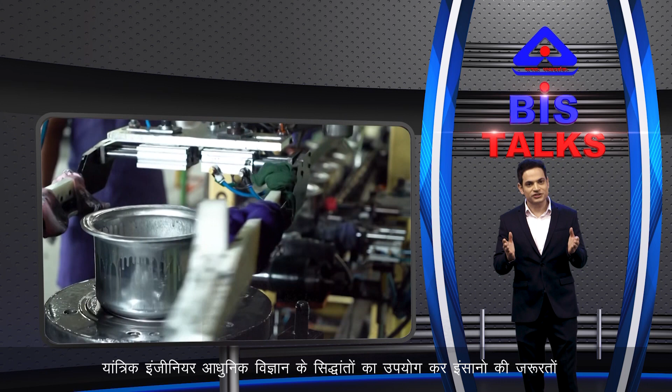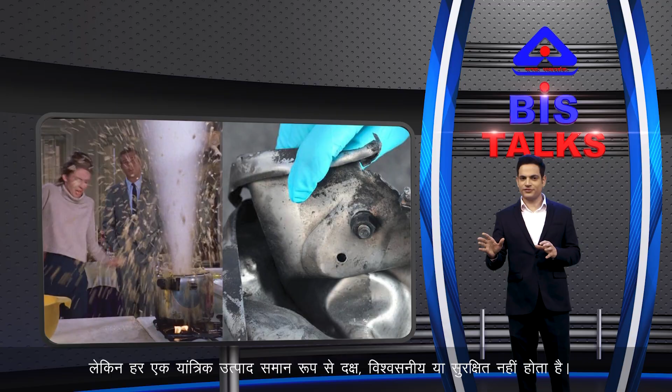Mechanical engineers use principles of modern science to create machines to meet a wide range of human needs. Hence, the objective of mechanical engineering is to create products that complement modern living in every way. But every mechanical product is not equally efficient, reliable, or safe. That's why it becomes even more important to make them follow seamless quality parameters specified in the BIS standards.

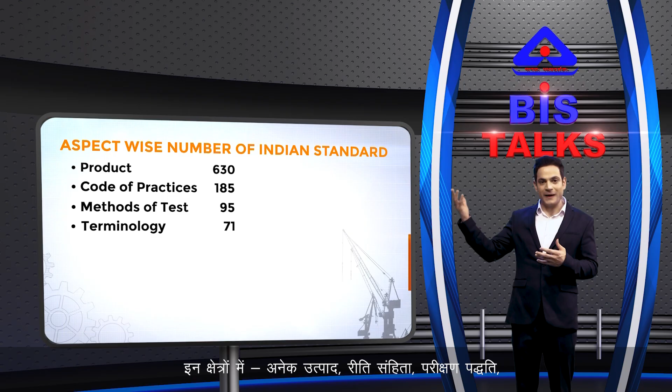When it comes to setting standards in India, the Bureau of Indian Standards is the ultimate authority. Till date, the Mechanical Engineering Department of BIS has formulated around 1,356 standards. The division is responsible for a vast number of areas within its domain, touching our lives in multiple ways. These areas cover products, code of practices, methods of test, terminology, among many others, which we have listed here for you.

BIS officers do not formulate standards in isolation. There is a streamlined mechanism to involve all relevant stakeholders of the particular field in the process of standard formulation. Let's first hear from the chairman of the council.

Mechanical Engineering Division of BIS oversees standards for heavy engineering, serving the core sectors of economy such as energy, mining, transportation, as well as the light engineering sector encompassing consumer goods to utility products. MEDC is organized with 28 technical committees entrusted with the responsibility of formulating, updating, and adopting standards needed for the products and processes. The technical committees are headed by industry experts in the respective domain to bring in latest concepts and standards needed for upgrading Indian products to compete in global markets.

MEDC is playing a pivotal role in evolving and upgrading standards, thereby uplifting the quality benchmark to make products globally competitive, which is vital for sustaining economic growth and boosting Indian economy.

Let's hear from the head of the department who leads the effort of setting standards in BIS for the Mechanical Engineering Department. It is the constant endeavor of BIS to formulate standards and revise standards that are in line with national priorities and emerging technologies.

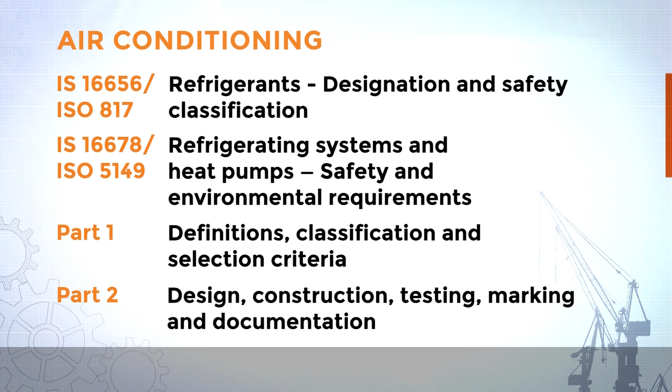Have you ever wondered what modern life would be without a refrigerator? I mean, not just about the ice and cold drinks, but the huge lot of conveniences they offer in terms of storing food and other stuff.

Refrigeration helps in preservation of food and beverages, which in turn affects the health of an individual. It is also a source of income generation for small shops which sell commodities with limited shelf life. Modern life also demands commercial refrigerating appliances like deep freezers, walk-in cold rooms, and display cabinets. I think you will agree with me that to be completely efficient and effective, they too need to follow seamless standards. Let's get more clarity on the subject from our expert.

The standard on household refrigerating appliances have been revised recently, where the direct cool and frost-free technology have been merged into a single standard. This standard specifies the essential characteristics of household refrigerating appliances cooled by internal natural convection or forced air circulation. The tests defined in the standards are meant to assess the fundamental design and operation of refrigerating appliances. Various tests such as storage test, cooling capacity test, freezing capacity test, mechanical strength test, electrical safety test, etc. are specified to ensure performance and safety.

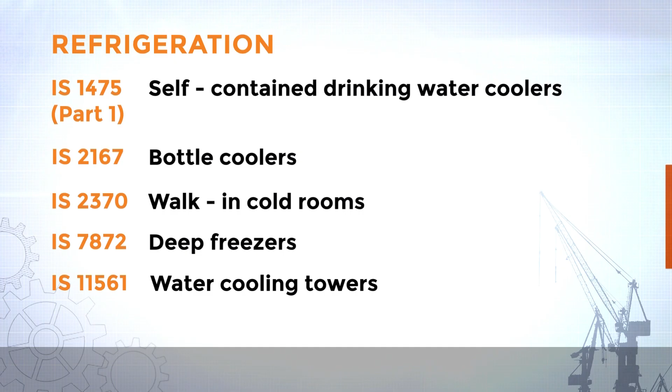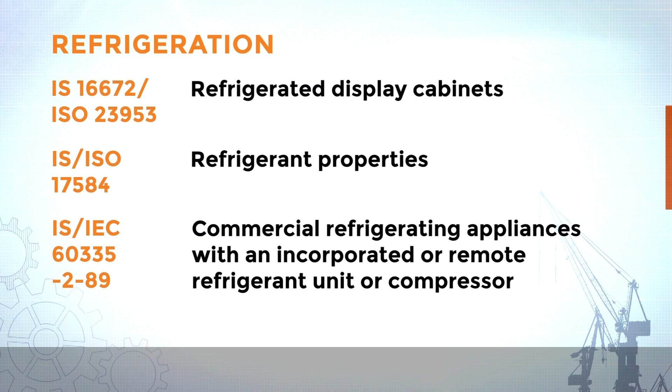Let's move on to our next subject.

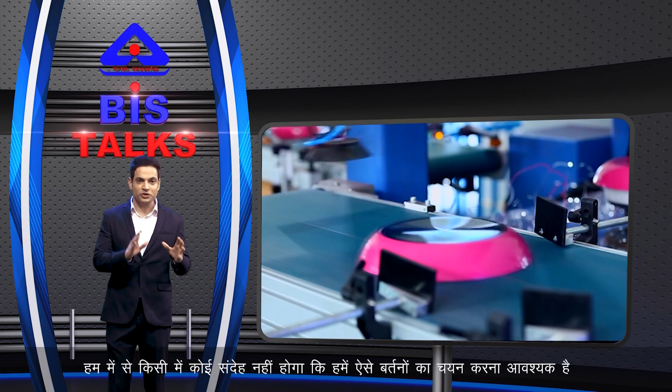I think there is no doubt in any of us that it's absolutely necessary to pick the utensils that are safe to use and efficient enough for the specific function. Also, the pots and pans we use for cooking and eating have to follow stringent quality parameters since it directly affects our health.

The most visible sign of implementation of these BIS standards could be seen on the humble, everyday pressure cooker. The pride of every kitchen should come with an ISI mark, that's for sure.

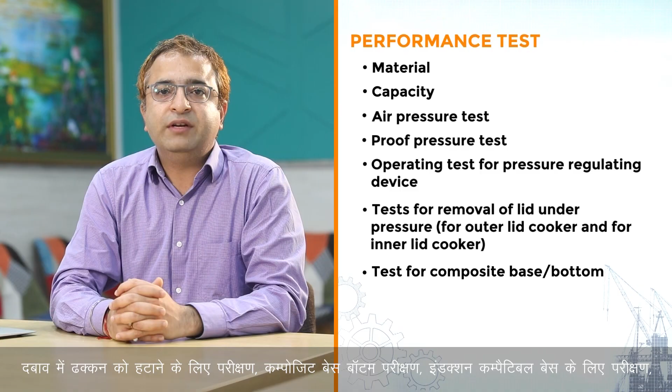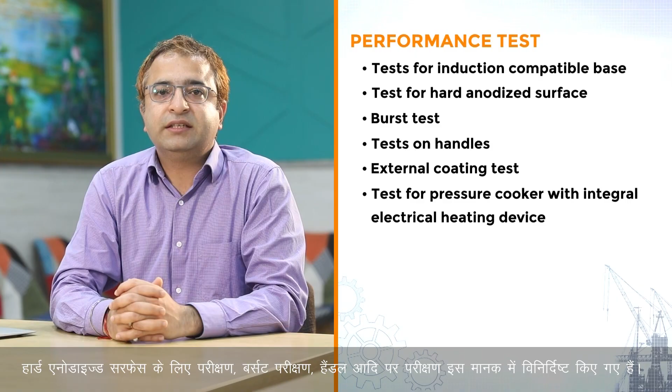IS 2347 covers the requirements for domestic pressure cookers. To ensure the safety and quality of pressure cookers, performance tests like material, capacity, air pressure, proof pressure, operating test for pressure regulating device, test for removal of lid under pressure, test for composite base or bottom, test for induction compatible base, test for hard anodized surface, burst test on handles, etc. has been specified in this standard.

Now for the other pots and pans we use to store, cook and eat food, their quality too has a direct bearing on our health. For instance, the standard IS 14756 prescribes general requirements, quality of material and thickness for stainless steel cookware.

IS 14756 lays down the requirements of cooking, serving, and storage type stainless steel utensils. To ensure safety and performance, tests like material, staining, mechanical shock test, thermal shock test, dry heat test, and coating thickness test have been specified in this standard.

Other important standards under this area are listed here. Let's move on to our next subject.

Cooking gas mostly comes in the form of LPG, or liquefied petroleum gas. This is the go-to cooking solution that we are so familiar with, and the risk factor gets minimized to negligible through the standards set by BIS. Let us now understand this better with a manufacturer who will acquaint us with the value of standards.

IS 3196 Part 1 standard is for manufacturing cylinders for liquefied petroleum gases, LPG. As all are aware, the LPG cylinder is an integral part of kitchens for cooking purposes. This standard lays down the minimum requirements for the materials, design, manufacture, construction, tests and marking on these cylinders. Depending on the capacity, the construction can be 2-piece or a 3-piece cylinder. This standard prescribes requirements like design, welding, minimum thickness, valve connection, foot ring, valve protection ring, heat treatment, etc.

This standard also prescribes tests like radiographic examination, water capacity, hydrostatic test, pneumatic leakage test, fatigue test, hydraulic burst test, mechanical tests to ensure safety of the cylinder.

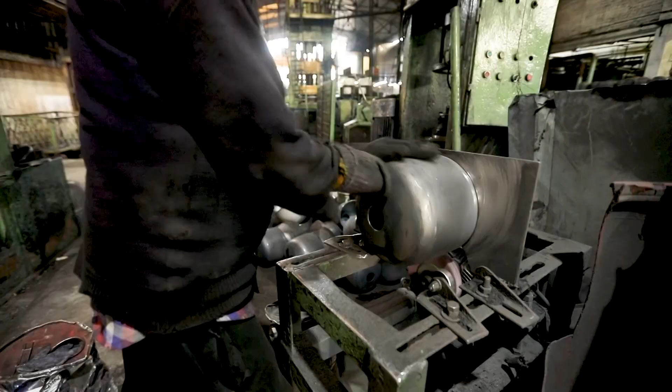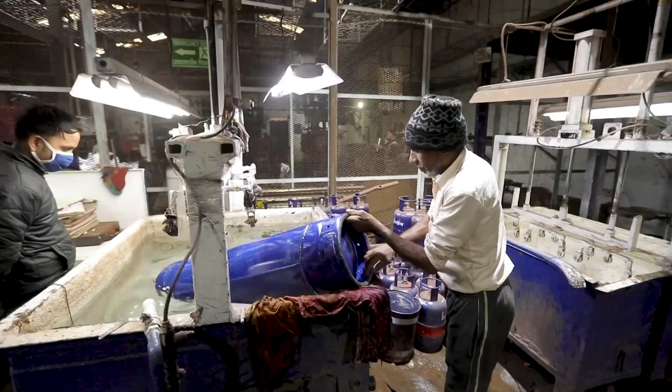Other important standards under this domain are listed here.

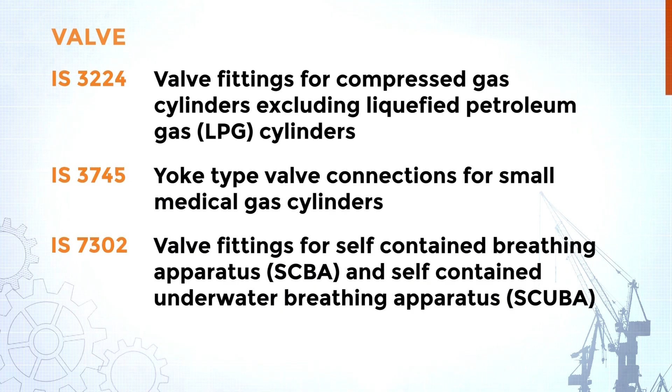Up next is the gas stove. The importance of this standard can be estimated by the fact that there are about 300 BIS licensees for one single product, the LPG gas stove. To make them safe, efficient and reliable, multiple tests are conducted before certifying LPG stoves, which have been specified as per IS 4246.

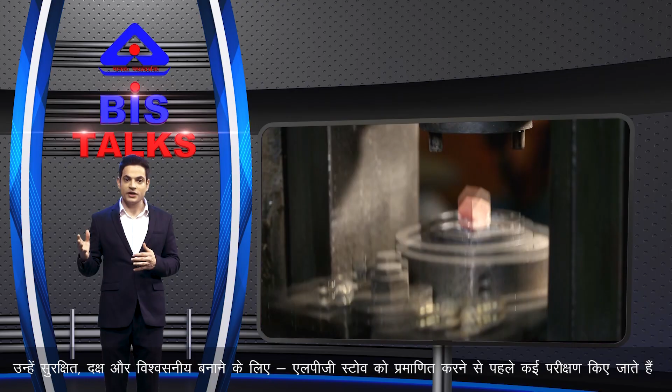A relatively new entrant to the field is the gas stove for use with piped natural gas, or PNG, covered by IS 17153. With more than 50 lakh users, usage of PNG as a cooking medium is now on the rise.

There are two standards on gas stoves: IS 4246 on LPG and IS 17153 on PNG. IS 4246, domestic gas stoves for use with liquefied petroleum gases, specifies construction, operation, safety requirements and tests for domestic gas stoves with metallic bodies, with or without toughened glass top, intended for use with LPG at 2.942 kilonewtons per square meter gas inlet pressure.

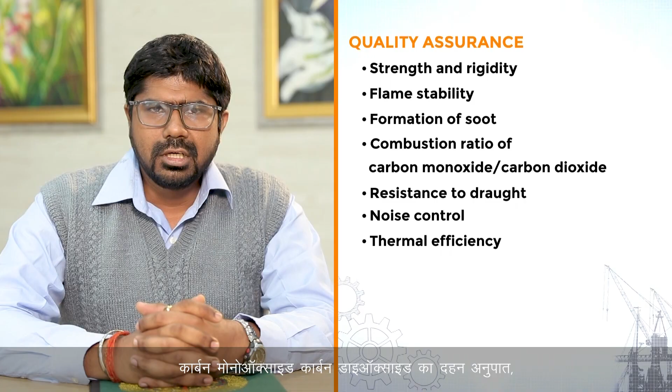To ensure quality and safety, various tests are performed such as strength and rigidity, flame stability, formation of soot, combustion ratio of carbon monoxide to carbon dioxide, resistance to draught, noise control, and thermal efficiency. The standard for PNG, IS 17153, domestic gas stove for use with piped natural gas, is similar to IS 4246. The difference is in delivery pressure of PNG, which is 2.14 kilonewtons per square meter, and minimum thermal efficiency of PNG stove is 50%, whereas for LPG it is 68%.

Let's move on to our next subject.

IS 17018 Part 1 talks about the standard related to solar photovoltaic water pumping systems, centrifugal pumps. It specifies the technical requirements for solar photovoltaic water pumping systems for handling clear cold water, covering design qualifications and performance specifications. The pump set of this system can be installed on a suitable bore well, open well, water reservoir, water stream, etc.

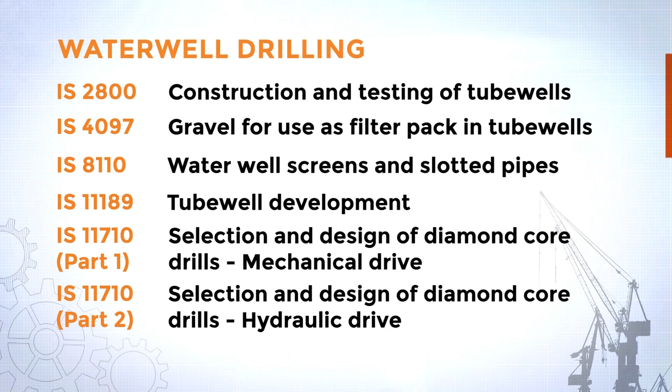Let's move on to our next subject.

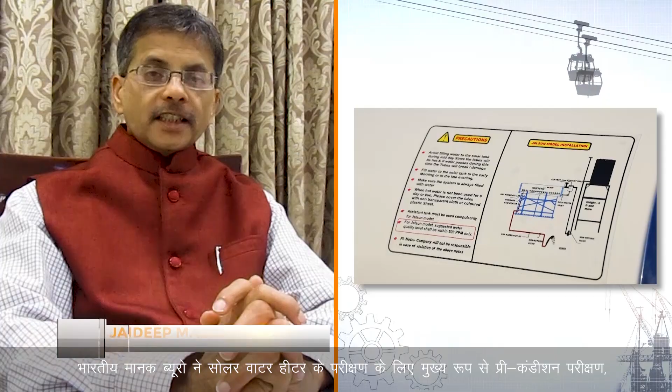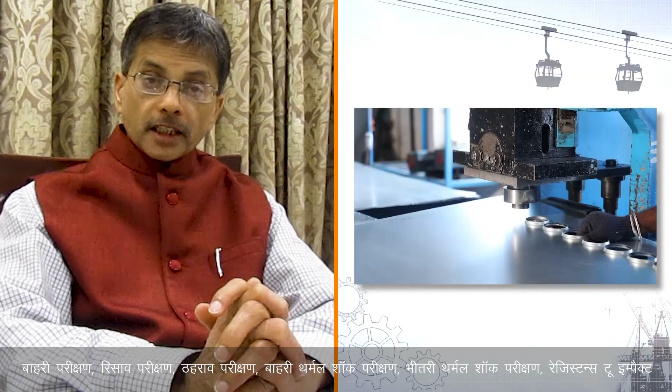India is a land of abundant sunshine. This makes solar energy one of our most widely available natural resources, and this reflects in the increasing popularity of solar products. The Bureau of Indian Standards has laid protocols for testing solar water heaters, namely precondition test, exterior test, leakage test, stagnation test, external thermal shock test, internal thermal shock test, resistance to impact, and thermal performance.

Thermal performance is a measure of the efficiency of a solar water heater. It is measured as the difference of temperature at the beginning of the day and the heated water achieved at the end of the day. Higher the temperature, better is the quality of components used.

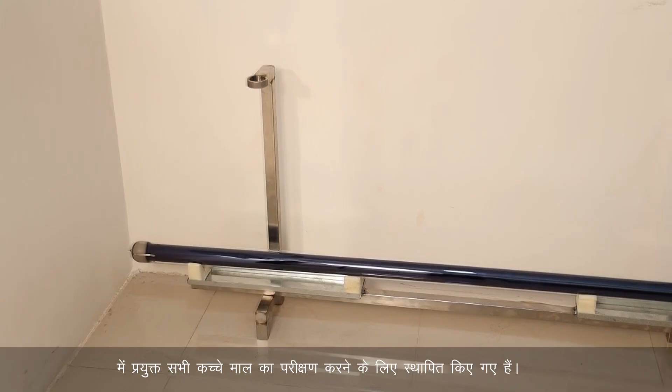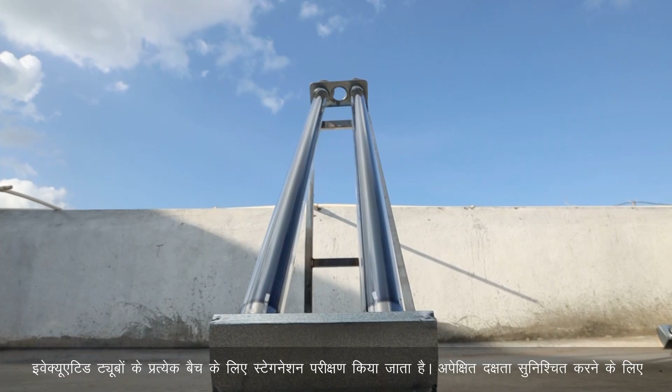Our testing laboratory and R&D center is established to test all raw material used in solar water heating systems. For each batch of evacuated tube supplied, an impact test using a 120 gram stainless steel ball is conducted. Stagnation test is conducted for each batch of ETC tubes. Only 3-layer tubes are used to assure required efficiency.

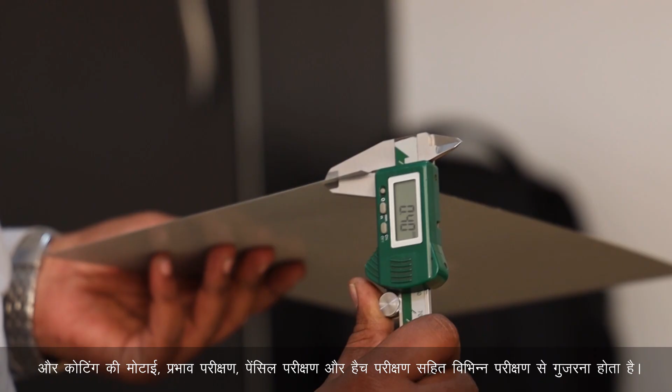The pre-painted PPGI sheets, with top coating of minimum 20 microns and a bottom coating of 7 microns, are used for outer cladding and undergo various tests including checking coating thickness, impact test, pencil test and hatch test. All tests are conducted as per IS 16368 of 2015. Here is the list of some of the key standards under this area.

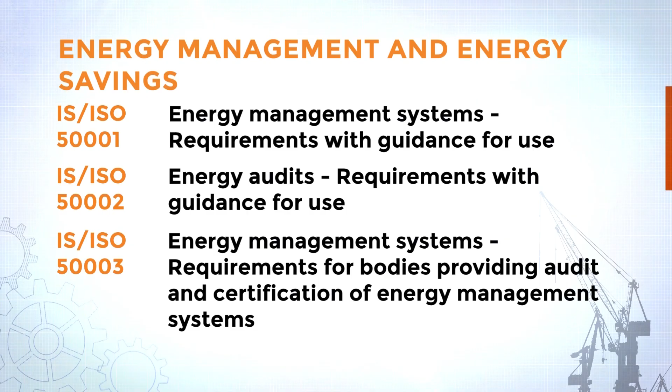Let's move on to our next subject.

If we are asked to make a list of things we need for our complete peace of mind, I am sure most of us will have safety and security at the top of that list. Not just for our own selves, but also for the things that we value, stuff that we have earned and assembled by spending time and energy, our most important assets. Simply said, to keep our earnings and valuables safe, we need a safe.

IS 550 Part 1 specifies the dimensions, general requirements and performance criteria for safes used in financial institutions and commercial organizations. This standard is published in 3 parts. Other parts in the series are Part 2, Test for Burglary Resistance, and Part 3, Test for Fire Resistance.

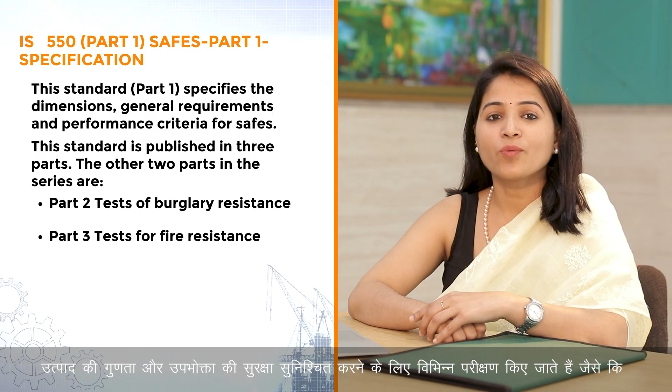To ensure the quality of products and safety of the consumer, various tests are performed such as burglary resistance, fire endurance, fire and impact test, and lock operation test. Here is the list of some of the key standards under this area.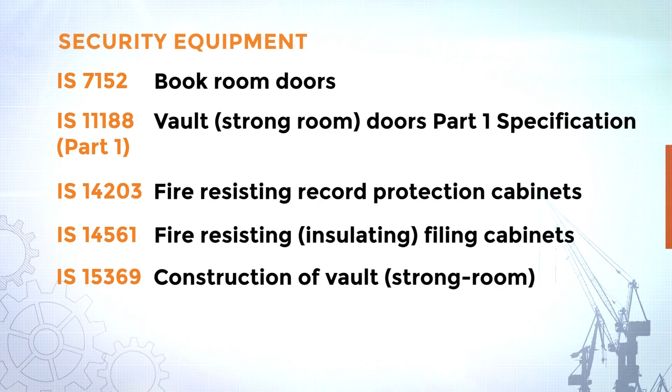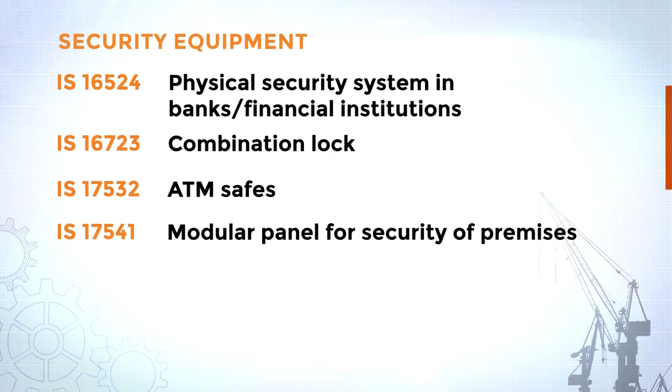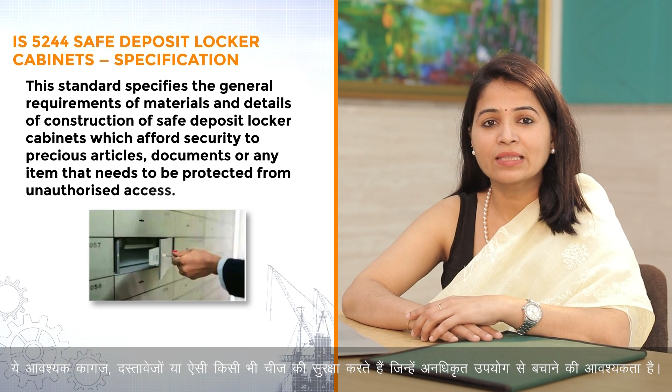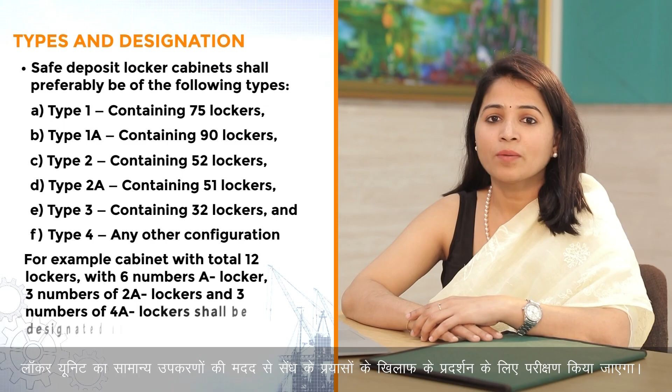IS 5244 is the standard specification for safe deposit locker cabinets. These afford security to precious articles, documents or anything that needs to be protected from unauthorized access. To ensure the quality of the locker and safety of the consumer, the locker unit shall be tested for its performance against burglary attack with common hand tools. The locker unit shall be able to successfully withstand such attacks for a period of not less than 15 minutes.

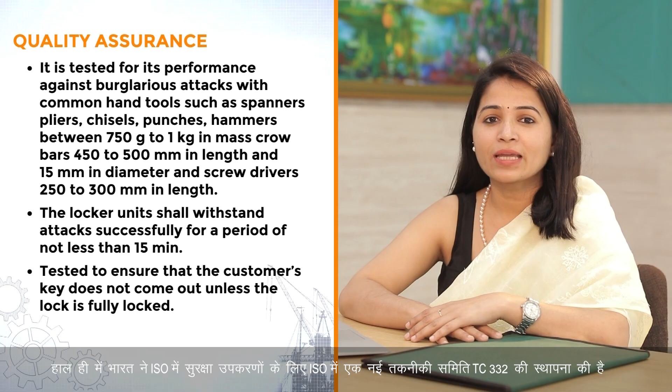Recently, India has also been able to establish a new technical committee, TC 332, in ISO on security equipment, with India bagging the secretariat role for managing the committee. The department has also made its foray into national security, and numerous standards are under the process of formulation.

The subcommittee on standardization of ballistic security products has taken up the subject of BP Morcha, BP Bunker, BP Patka, Mobile Sentry Post and Observation Tower for standardization.

As we all know, Indian Armed Forces, Central Armed Police Forces and other law enforcement agencies face threats from small arm ammunitions during flushing out operations, room interventions and other similar types of operations. Standardization in the field of personal safety has always been a challenging issue to render more secure products to operators and consumers.

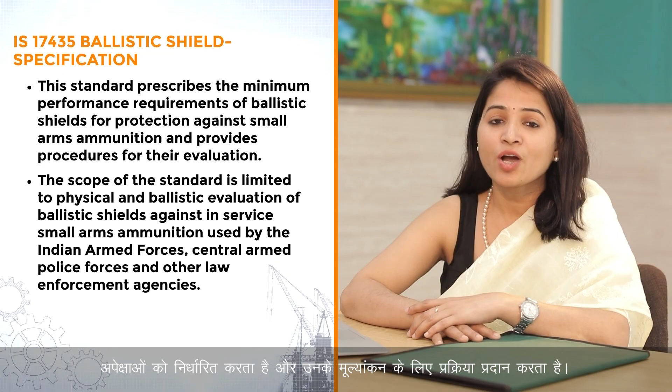Recently, BIS has published IS 17435 Ballistic Shield Specification. This standard prescribes the minimum performance requirement of ballistic shields for protection against small arm ammunitions and provides procedures for their evaluation. The scope of the standard is limited to the physical and ballistic evaluation of ballistic shields against in-service small arm ammunitions used by Indian Armed Forces, Central Armed Police Forces and other law enforcement agencies.

To ensure the quality of the product and safety of the consumer, various tests are performed such as ballistic test, multi-hit test, wet test for polymeric material and extreme temperature test.

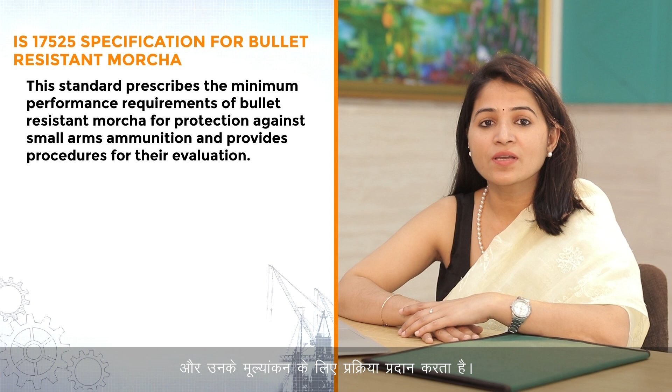IS 17525 is the specification on bullet resistant morcha. This standard prescribes the minimum performance requirement of bullet resistant morcha for protection against small arm ammunitions and provides procedures for their evaluation. The scope of this standard is limited to physical and ballistic evaluation of the morcha against in-service small arm ammunitions used by Indian Armed Forces, Central Armed Police Forces and other law enforcement agencies.

To ensure the quality of the product and safety of the personnel, the tests performed on the products are ballistic test and multi-hit test. These standards are considered for procurement by various government agencies under the Ministry of Home Affairs and Ministry of Defence. Here is the detailed list of more standards pertaining to this area.

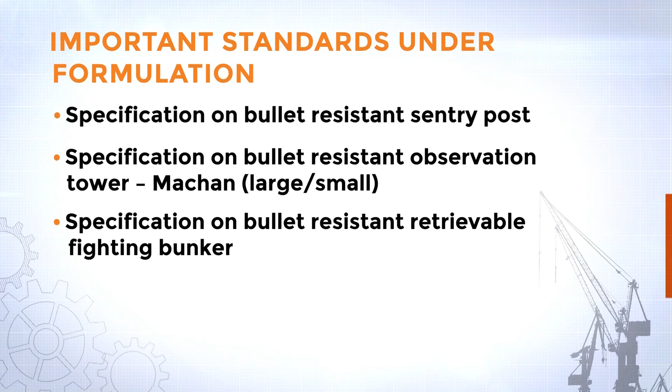Let's move on to our next subject.

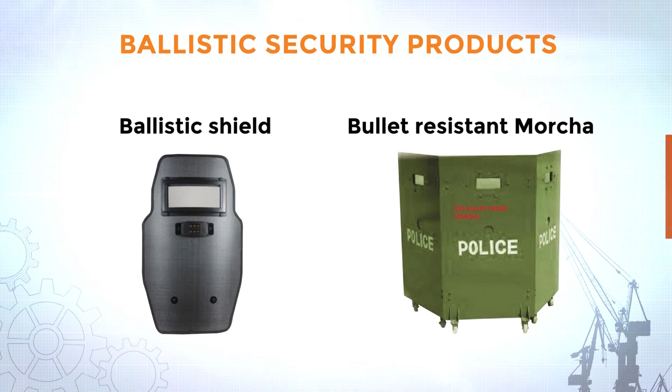The MED touches life in so many ways. We can't possibly cover all of them within the scope of this one show, but our story will be incomplete if I do not share with you another interesting area where mechanical engineering plays a major role. I'm talking about ropeways.

You must have seen them in the mountains, taking people and materials over steep inclines. This special form of transportation uses a tensioned wire rope supported above the ground to carry persons and materials. With modest power demands and no need for tracks or roads, they also help in preserving the environment.

Standards on ropeways cover the design and construction of continuous movement monocable aerial ropeways with fixed grips or automatic grip, to and fro movement bicable aerial ropeways, reversible movement monocable aerial ropeways with fixed grips, unidirectional intermittent movement monocable aerial ropeways with fixed grips,

and continuous movement bicable or tricable ropeways with detachable grip, intended for the transportation of passengers and goods. To ensure the quality of the product and safety of the consumer, various tests are performed such as capacity test, wind action test, maximum speed and minimum spacing between vehicles or group of vehicles, rope guiding, crossings and dangerous areas.

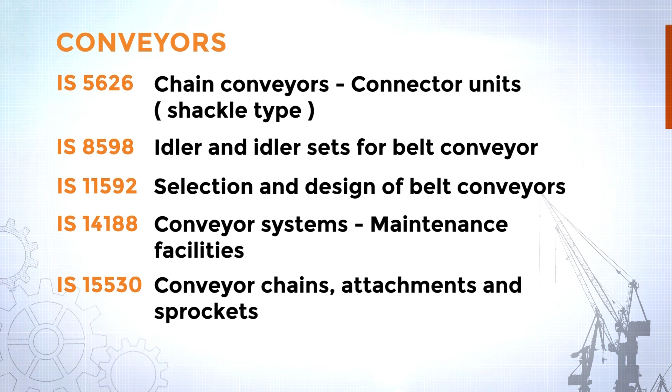Let's move on to our next subject.

IS 16819 is adoption of ISO 12100. This is a Type A safety standard. This standard specifies basic terminology, principles and methodology for achieving safety in the design of machinery. It specifies principles of risk assessment and risk reduction to help designers in achieving this objective.

Procedures are described for identifying hazards and estimating and evaluating risks during relevant phases of the machine life cycle, and for the elimination of the hazard or the provision of sufficient risk reduction. Guidance is given on the documentation and verification of the risk assessment and risk reduction process. This standard provides strategy for risk assessment and risk reduction.

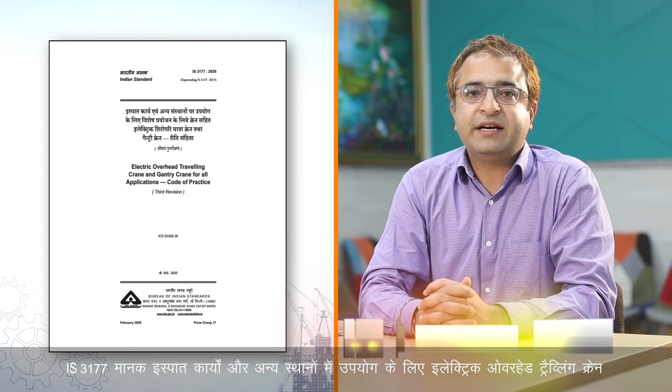IS 3177 standard covers requirements for design, manufacture, inspection and testing of electric overhead travelling cranes and gantry cranes for use in steelwork and other locations. This code is extensively used by designers, consultants, heavy industries like the steel industry for lifting loads in indoor and outdoor applications. Based on average working hours per day and minimum average total life in working hours, this code classifies cranes as M1 to M8 types.

This code covers both mechanical as well as electrical aspects of the crane.

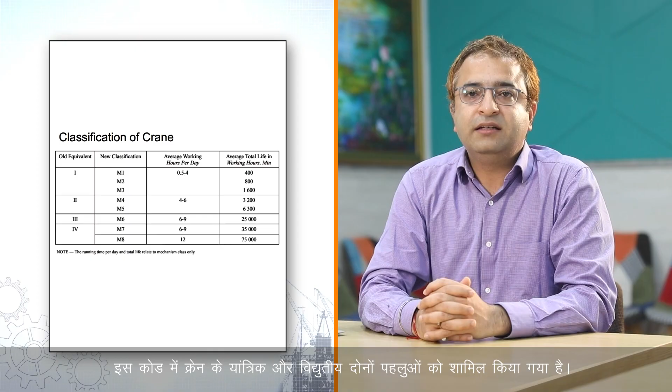Regarding mechanical aspects, requirements for design procedure, hooks, wire ropes, sheaves, track wheels, buffer, bearings, gearbox, lubrication system, rails, operating cabin, platform, etc. have been specified.

Regarding electrical aspects, requirements for power supply, cables and conductors, electrical protective and safety equipment, contactors, emergency switches, design and selection of motors, crane controls, lifting magnets and load holding devices etc. have been specified.

For safe operation of the crane or in idle condition, tests like main hoist and auxiliary hoist, cross travel motion, bridge motion (long travel), no load test, and overload test have been specified.

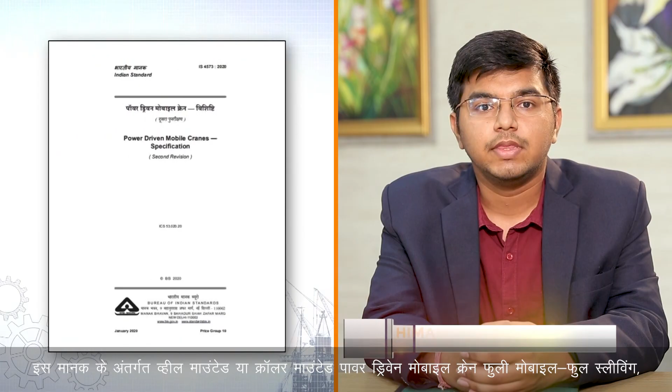IS 4573, Power Driven Mobile Cranes Specification. This standard covers wheel mounted or crawler mounted power driven mobile cranes of the fully mobile, full swing, part swing, non-swing type; truck mounted fully mobile, full swing, part swing and non-swing type; and semi-mobile and portable type cranes.

Various tests such as functional test, overload test, testing of indicators, stability test and performance test with rated load are performed to ensure performance and safety.

I will talk about IS 5456, related to compressors. This standard prescribes type test and routine test for both reciprocating and rotary type positive displacement air compressors and exhausters. This standard does not deal with centrifugal and axial flow compressors and machines giving a pressure rise of less than

0.01 megapascal and greater than 6 megapascals. Various tests and requirements recommended for quality assurance are mechanical test, capacity free air delivery, and specific power consumption at various

pressures from minimum to maximum working pressures under full flow conditions, maximum operating speed, volumetric and overall efficiency of machines, lubricating oil consumption, testing of loading and unloading mechanism, and flow of cooling water if applicable, with rise in temperature.

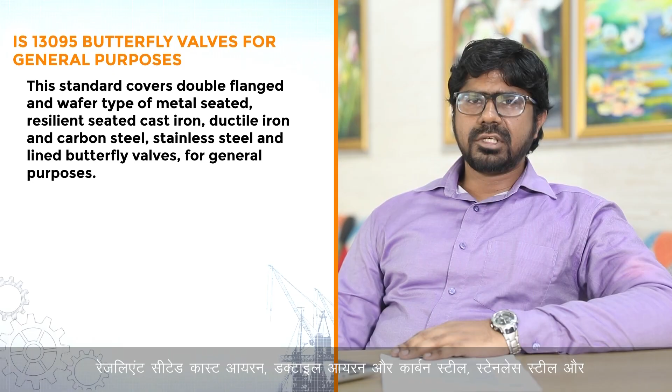IS 13095, Butterfly Valves for General Purposes, covers double flanged and wafer type of metal seated, resilient seated cast iron, ductile iron, carbon steel, stainless steel and lined butterfly valves for general purposes.

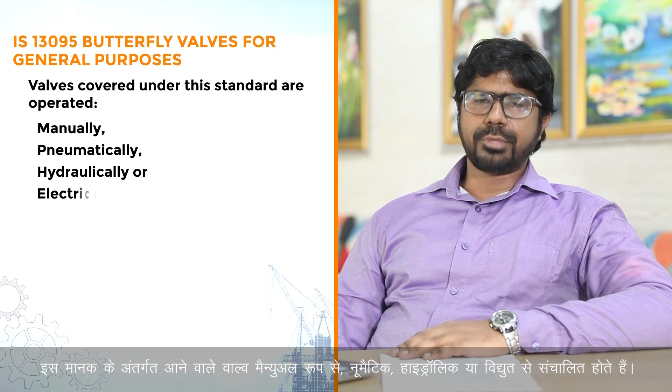Valves covered under this standard are manually, pneumatically, hydraulically or electrically operated. Various test requirements recommended for quality assurance are performance testing, body testing, seat test, and disc strength test.

ISO 10821 is on industrial sewing machine safety requirements for sewing machines, units and systems. This standard specifies safety requirements applicable to sewing machines, units and systems designed for professional use, such as industrial, commercial or

laboratory use in industries including clothing, footwear, leather goods, shirts, knitwear, gloves, upholstery, packaging industry, shoe repair, etc.

The significant hazards, hazardous situations and events identified in the risk assessment are significant for this type of machine and require action to eliminate or reduce the risk.

Safety measures and requirements for mechanical equipment, electrical equipment, control gears, thermal requirements, noise, radiation, ergonomics, etc. are provided. Here is a detailed list of more standards pertaining to this area.

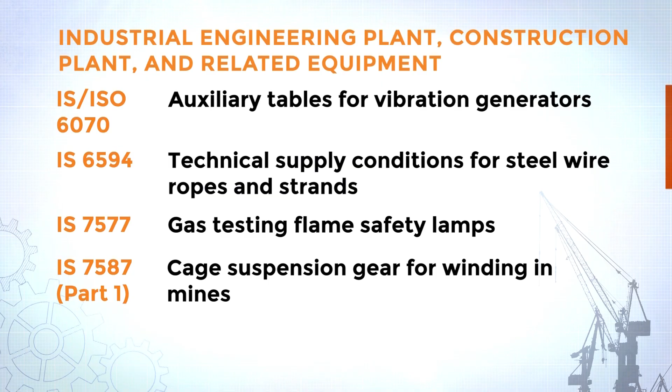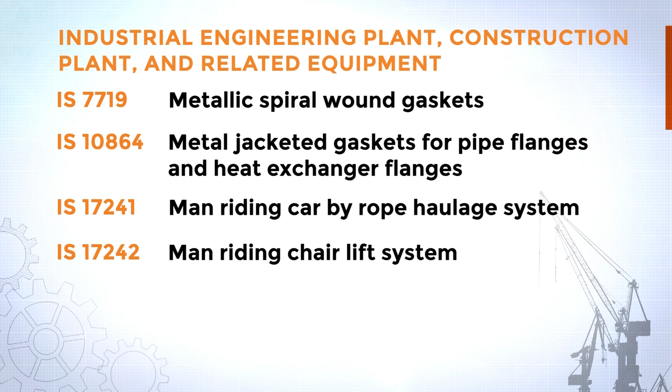Standards are the milestones of a nation's performance and well-being. Compliance to them is an absolute necessity with no exceptions.

BIS ensures compliance to the existing Indian standards and systematically tries to bring new subjects within the sphere of standardization to keep pace with the latest technologies.

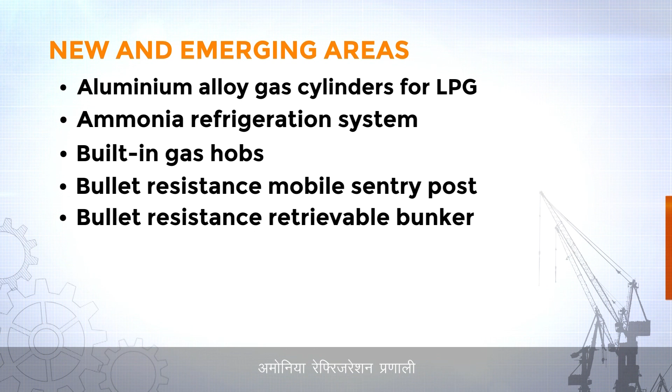Some of the new and emerging areas are aluminum alloy gas cylinders for LPG, ammonia refrigeration systems, built-in gas hobs, bullet resistance mobile sentry post, bullet resistance retrievable bunker, combo valve,

gas stoves with ceramic burner, hand pump cum solar pumping system, insulated flask, insulated container, low pressure cooker, 990 liter LPG cylinders, multiple split system air conditioners, observation tower, portable LPG appliances and residual pressure cylinder valve.

In order to make the standardization process more transparent and open, BIS has digitized the standardization process and launched the eBIS portal, so that all stakeholders—be it manufacturers, consumers, users, etc.—can participate in the standardization process in a constructive

way, by submitting new work item proposals for standard formulation, reviewing published Indian standards, providing comments on draft standards under wide circulation, and applying for membership in the technical committees.

The BIS e-governance portal, Manak Online, provides a comprehensive view of its activities including standardization. This portal serves BIS technical committee members and also other users of Indian standards.

Filters to view the aspect-wise Indian standards classified based on test methods, product specifications, codes of practices, etc. are also available. The list of Indian standards relevant to various ministries and departments can also be accessed online.